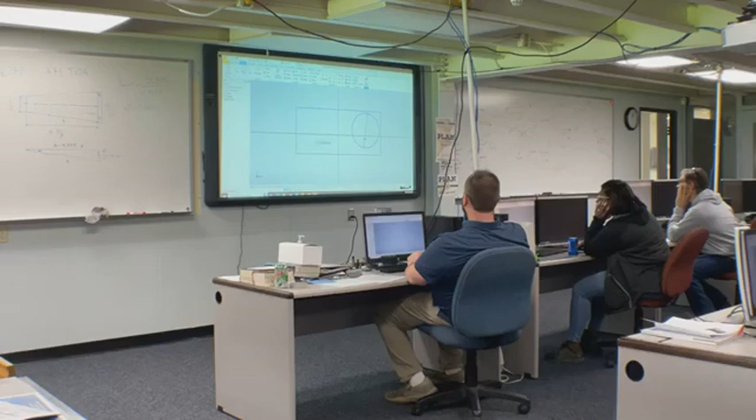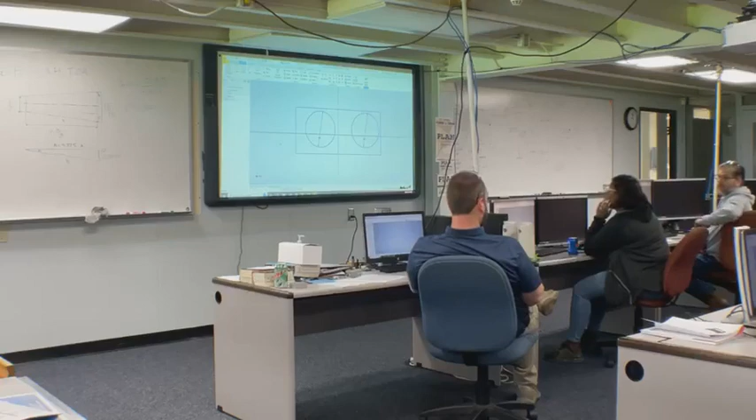As long as it stays within the confines of that rectangle, you can just drag it out, or you could actually enter a dimension, however you want to do it. Then come over to the opposite side and do the same thing again, just draw you a circle of some size. Does everybody have something that looks remotely close to that? Yeah, that's all we're asking for.

You want a hand? No, you're fine, here, we'll make it quick. We're going to use a rectangle command, just drag and drop a rectangle. I see, somehow your line type has been changed. Yeah, that's what was confusing me. Your line type, that's going to make all the difference for you.

All right, let's finish sketch. Now let's create a new sketch, just to let you start from scratch. All right, start a sketch.

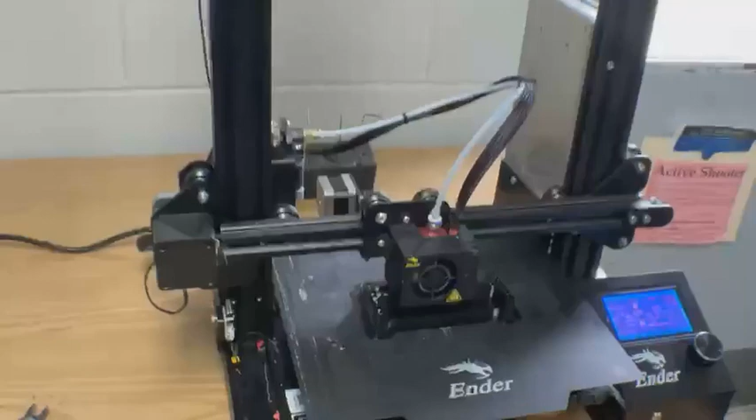Now things should start to look different for you. Okay, all right, yeah, that's what was missing. Sorry about that, I'm not sure how that happened. Center point circle, I'm just going to drop a circle in there, then I'll come over here and do the same thing again. I wanted to see what it looks like.

So you can call it whatever you want. I mean, kind of looks like a stovetop or an old stereo or something, whatever you want to call it.

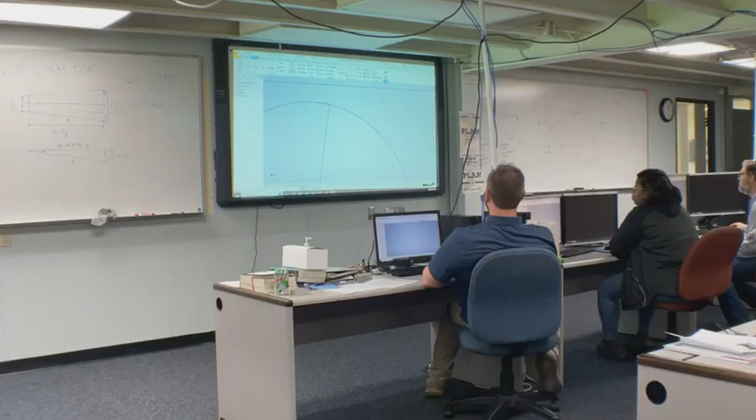All right, so I just want to show you a couple of features of this software real quick. Let's say we want to make a slot out of this, so let's connect these two circles. Let's take a line, take our line command, and draw a line tangent to the top of both circles. You're like, well, hold up, I only know what tangent means, how do I do that?

Well, if everybody will watch me, I'm going to show you one of the neat, powerful things about this software. Just draw something arbitrary, it doesn't matter what, you know that line's supposed to be tangent to the circle. Now come up here and select your tangent constraint, select the line, select that circle. Line, circle, it's going to make it tangent. Now it may shift the rest of your model to make it work, but the software is going to do whatever it has to do to make that constraint true that you just gave it.

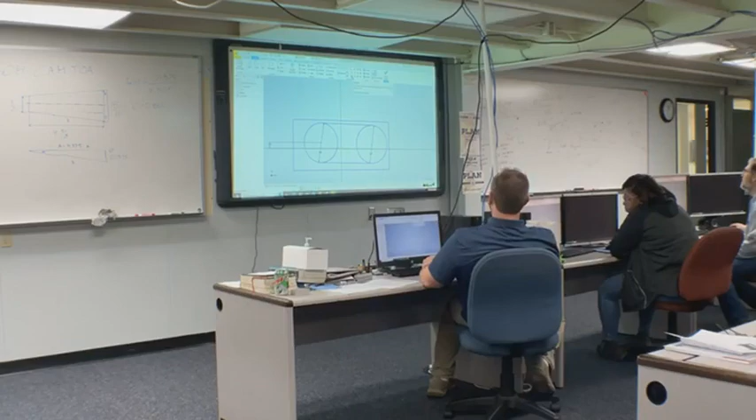All right, and now, right here, we have geometric constraints and we have dimensions. That's two things we're working with. I'm just assuming this back row is good, I'm not even walking back. Oh, that looks amazing, I don't know what you call it.

Yeah, one side did. Do you mind if I drive just a second.

So we want this line to be tangent to this circle. There we go, now you see that icon pop up. And you can tell that's not tangent because you've got that little giblet there. So, there, you see how it actually moved? And now, even though you're touching the bottom side here, you could do the same thing. There we go.

Now if you can just take a minute and just play around, do whatever, you can't mess up anything. You want to do what? It's not centered anymore once I do the bottom. Right, it's going to move whatever's not constrained to make the constraint you give it true. Okay, so it doesn't look true anymore. It looked more true before.

Where those lines are tangent now, that constraint you gave it is true. These two circles are two different diameters. That's right, is the issue. So what we could do...

Well, there's a couple different ways we could do this, but let's say that this vertical distance between those two center points should be 0. There we go. And now if you want to, you can come up here to your nice little trim command, clean this up. And now I'm going to go ahead and do the next step for you as well. Now we've got a slot. From 2 lines and 2 circles, we have made a slot.

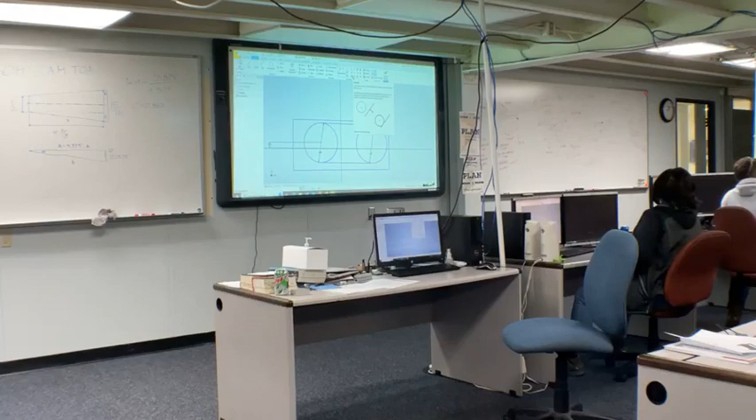So we can, all right, well, let's start over. No, absolutely not. We can do basically anything we want here. Let's say we want to move this by its center point. All right, yes, and now let's just simply move it. Now we're done with that.

Now, I'll tell you what, we'll do this to keep it simple. We'll do the same thing again. We're going to move that circle by the center point, that's what it means by base point. Okay, and now just move it down here somewhere. Okay, and now, to really...

All right, so we want this line to be tangent to this circle, and we want it to also be tangent to this circle. To make that true, it had to do that. So what we could do, move the circle, or we could move the line. Right now, I'm just going to delete the line. I'm going to delete this line and that little line.

I'm going to add a vertical dimension between these two center points, a vertical dimension. I'm going to change that dimension to 0. Now they're going to line up. That's just one way to go about it, you don't have to do it that way. Now I'm going to come back...

And I'm going to go ahead and draw my lines tangent now, or really close to tangent. And now, make that line tangent to that circle, line tangent to this circle. All right, easy enough, right? And now we're going to do the same thing on this bottom side. Line...

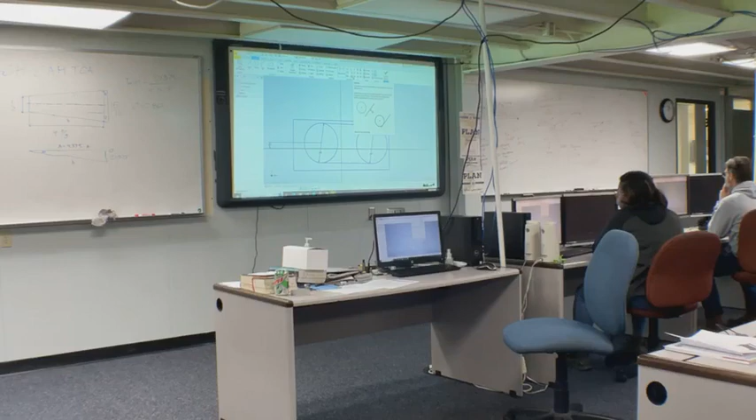Escape is your best friend with this software. All right, so the reason it's not trimmed out is one of these lines, we don't have what's called a closed region. Somewhere it's not actually touching.

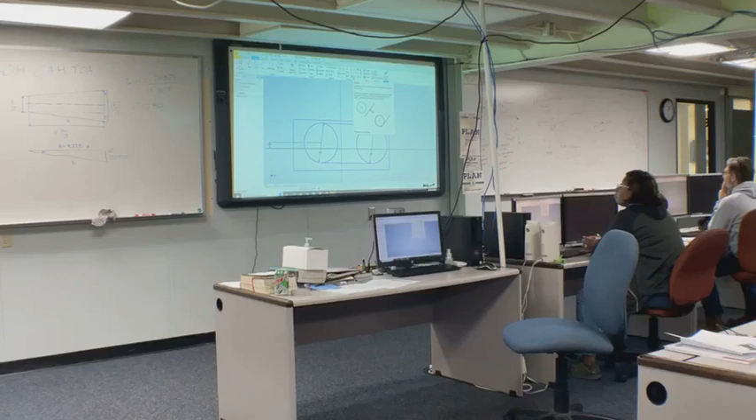I think it was at the top. So, all right, I just extended that out and extended that out. Now I'm going to come back and trim this side. And let's see if that took care of it. Trim. There we go. Okay. Beautiful.

All right, so everybody should be... there's really no right or wrong answer. This is just your time to play with the software.

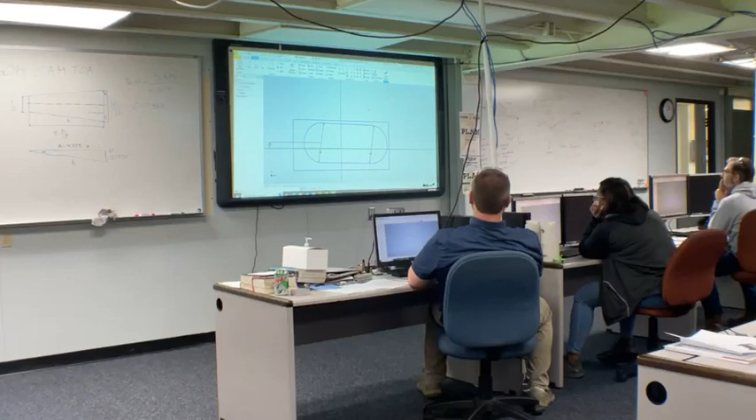Now I'm going to come back and I'm going to trim out the inside half of my two circles. And I'm left with that. All right, but so far, all we have done is put lines on paper. All we're doing is working in drafting space. This is 2D virtual paper space is what we're working in right now. I mean, this is the virtual or the computer-based equivalent of drawing on paper.

All right, let's finish the sketch. And now let's take it to the real world. Let's make this a 3D dimensional object. I'm going to come up here to extrude. I'm going to select this region here. How thick do... I'm going to slow down. I'm going to come back. There.

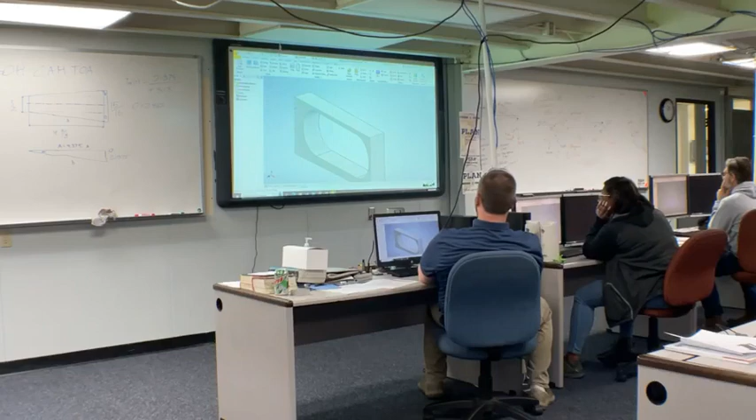Okay. So now, back in the sketch. I'm going to go back in my sketch, so I'll be the same place y'all are. Once you've got something similar, come up here and click on Finish Sketch.

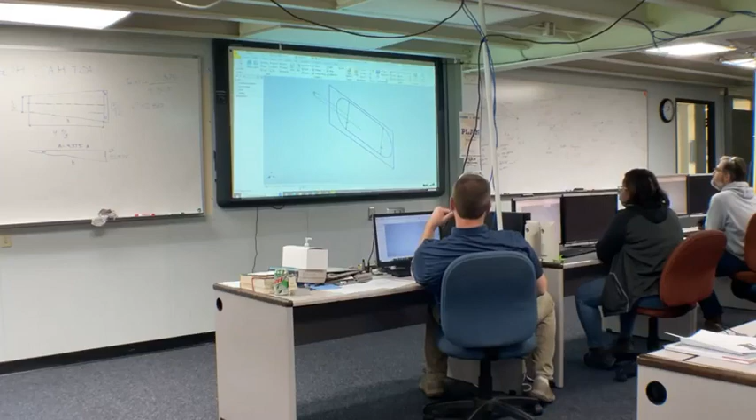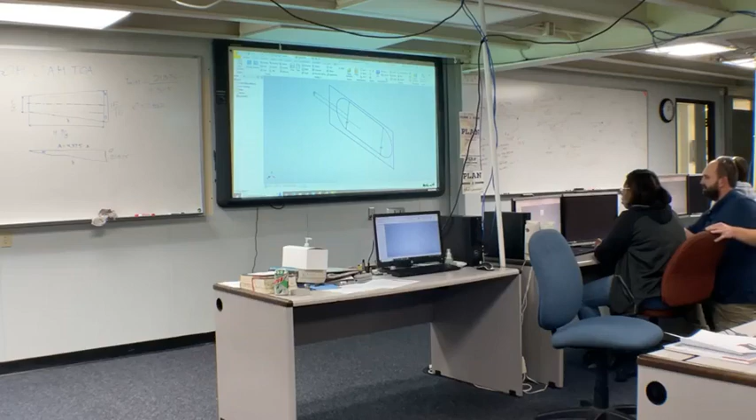Let's see what you got. When you trimmed it, it trimmed the whole circle because that line's not touching. So let's come do our tangent constraint. Boom. It was missed somehow. It happens all the time. Boom. There we go. Now finish sketch. Right there.

All right, so does everybody have something they can work with at this point? Yeah, everybody's got... that's all right. All right, you're good. Yeah, you don't have anything to ask about. You're in good shape there.

Let's see what you got here. There you go. You would just turn your view so you were looking at it from the very end. Look at that. All right.

So this is called parametric modeling. We can go back and change it. At any time, we could go back and make edits. That's why it's called parametric.

Take your job. Say that again. You don't have to worry about us coming to take your job. See what?

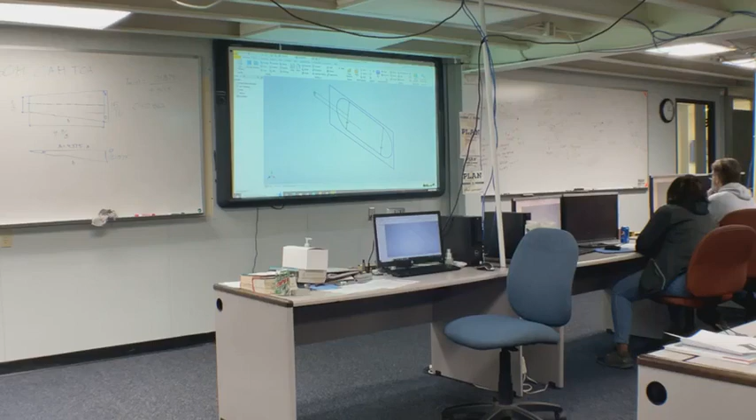Okay. All right. So now I'm gonna come back and I'm gonna trim the inside half of both of those circles. And now 2 circles and 2 lines made a slot, made a radial slot, an end mill slot.

All right. So now, once you've got something, I think most of you've got to this point now, but once you've got something, now we're going to finish our sketch. And now we're in 3D model mode.

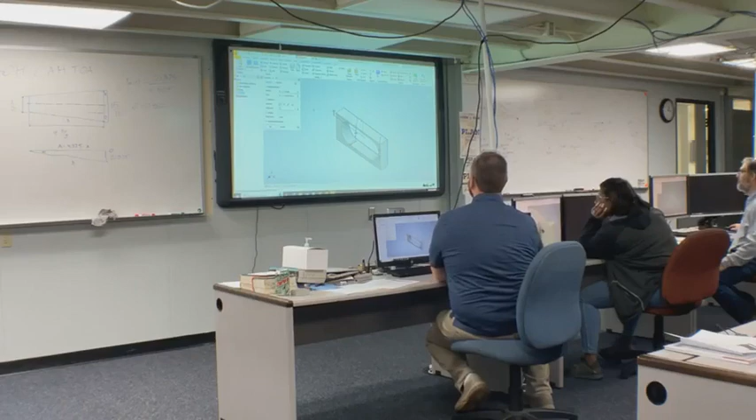Come up here, left hand end of your ribbon bar, and select extrude. And select the rectangular region of your part. Decide how thick you want it to be. I'm going to make mine a 1/2 inch right now. Click OK. And we have just gone from 2D paper space to 3D real physical object, just like that.

Did I do it right? Yeah. So I can just pick it up and move it. No, you can't do anything now. You can rotate your view. Select that, or you could use that, but select this little, there you go, select that, and now hold your left mouse, there you go. Okay. That's called free orbit.

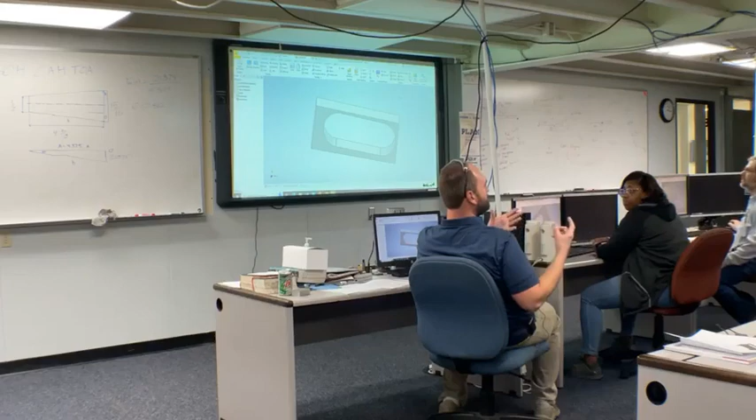So she asked an excellent question. Let's say we've got this part, we've made this part. This is feature-based modeling, meaning we're going to build up our part based on basic shapes. And that's what we just did. We used a rectangle, two circles, and two lines, and we made a part. That's all we did. So now let's say this part needs some other feature added to it.

So what I'm going to do is start another sketch, and I'm going to select the top face of this part. You can select any face you want, but I grabbed the top face of that model.

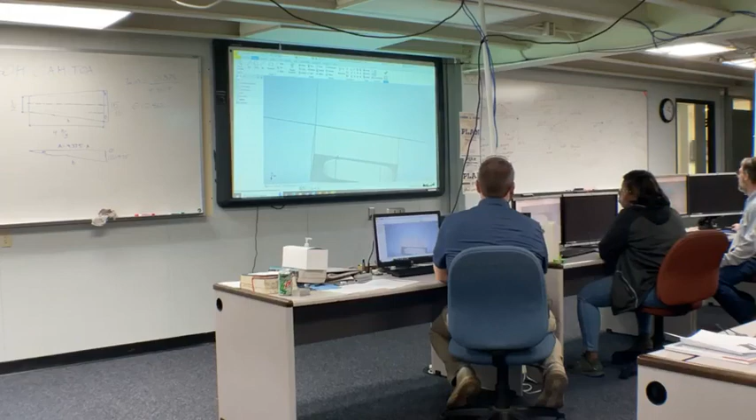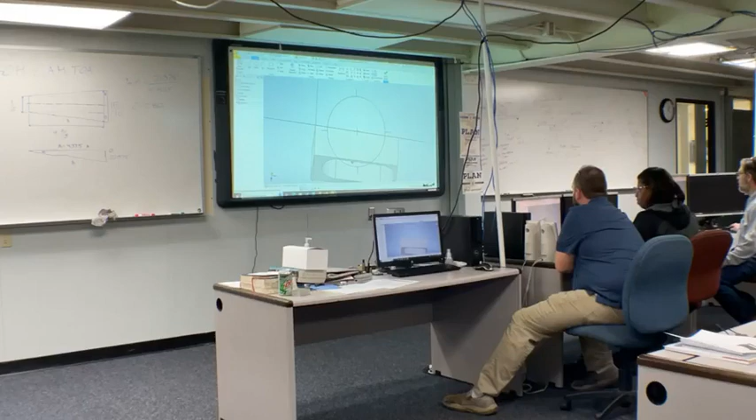Did you start a sketch? Okay, what face are you on? The front, I think. Okay, hurry up, let's see what you do. No, I like to just rotate to get my bearings. Yes, you are working. You see your grid, your coordinate system? So you're on the very front of that part. That's fine, draw something on it. Draw it, let's draw a circle. Whatever, now finish sketch. I'm going to pick that out. Look what you just did. Okay, all right.

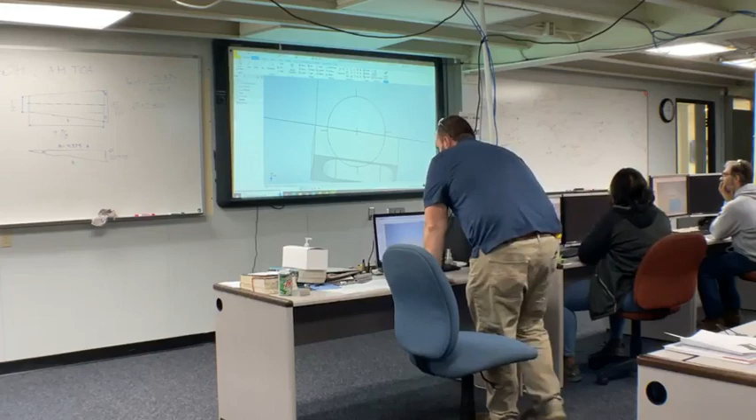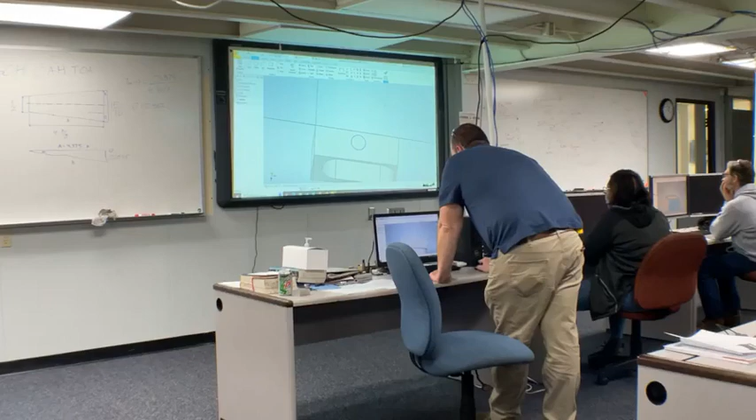All right, now I'm sketching on the top of my part. I created another sketch plane on the top of this model, so again you can do whatever you want. You guys are pretty experienced with sketching at this point, so come draw whatever you want. And when you're done, repeat the process: finish sketch, extrude. Here I can make a little stud coming out of my part, or let's say I want to go the other way and put a hole in my part. There you go, I just put a hole in my part. Did I need that hole?

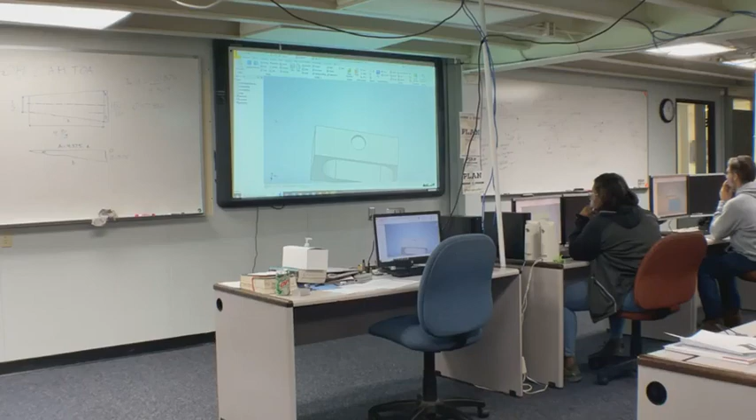Start 2D sketch, just select 2D sketch. Now select whatever face you want to sketch off of. Just click it, just click whatever side of the part you want.

All right, something's off, let's see. All right, you're already in a sketch, so what we're going to do is delete that, just to make sure we're on the same page. Start sketch, let's do this top face. Now to get your bearings, I just select my free orbit, left click drag. You can see where your grid is now, so that's the face you're going to be drawing on. Now you can just start doing whatever you want on that face.

Would you like some help with anything? Okay, all right. So we need to go ahead and speed up the process a little bit. I've got a lot I want to show you.

All right, let's think about the steps we've taken. I've tried to give you the basic premise of solid modeling, of parametric solid modeling. So if you combine those different tools, those different processes, you can do some really complex parts, some really complex shapes.

Here's one of my students' most recent designs. Ignore the file name if you can see it, but any guesses on what this part is? It does look like a bench. It's a park bench, a really small park bench. Do y'all have any need for a really small park bench? That's a great answer. So does anybody have business cards? Everybody here's got business cards, right? Everybody like a cool little bench to sit your business card in? Guess what, you came to the right place.

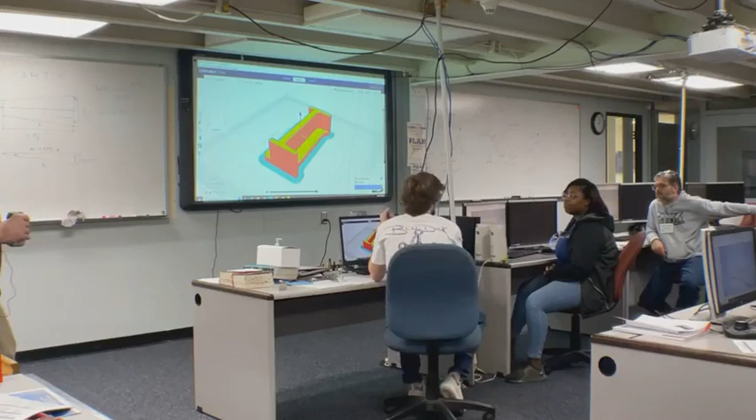As you can see, it's going to take about 5 hours and 32 minutes a piece. We were moving pretty fast along with those. We were printing about 4 at a time, so about a day and 2 hours per print, depending on which printer.

So the slicer is where you choose all the things that you want to do with this print. The print is going to remain the same, but you can choose how many walls you want around the outside, so how strong you want it. You can choose if you want like 25% infill. When I say infill, it's not a completely solid part. So I'll scroll down just a little bit.

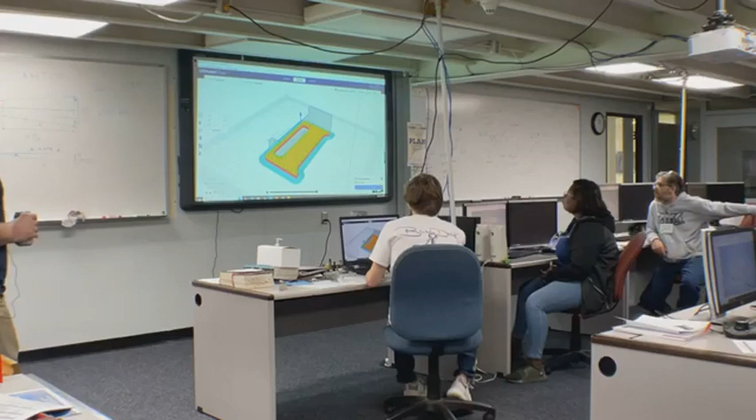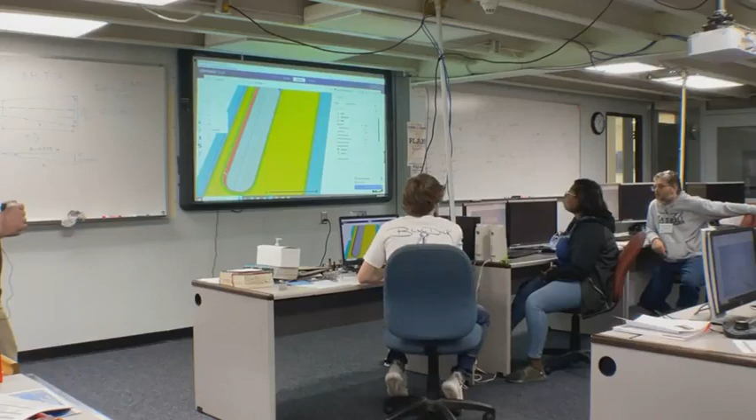This triangle pattern right here, it's not a completely solid part. That's just there to take up space and keep it pretty strong without wasting so much filament and keeping the time down. But with a couple clicks, I can go to infill... and make it a completely solid piece of plastic that the printer is going to print in.

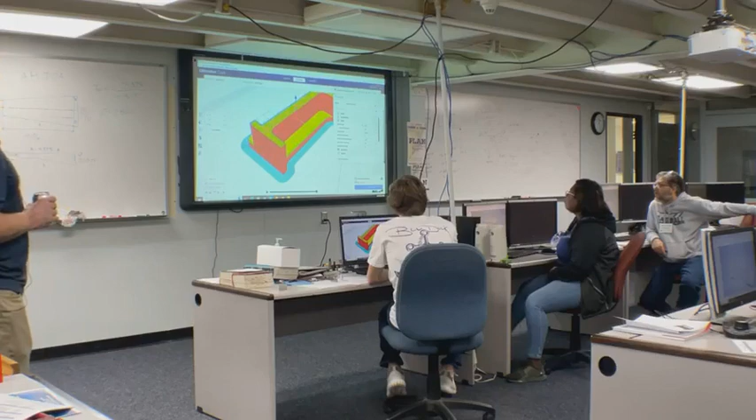It's double the time, but it's going to be much stronger. But for what it's doing, holding business cards, it doesn't need to be that strong. But you can see it goes layer by layer, so you can see exactly what it's doing on what layer. Here's all the different settings you can do.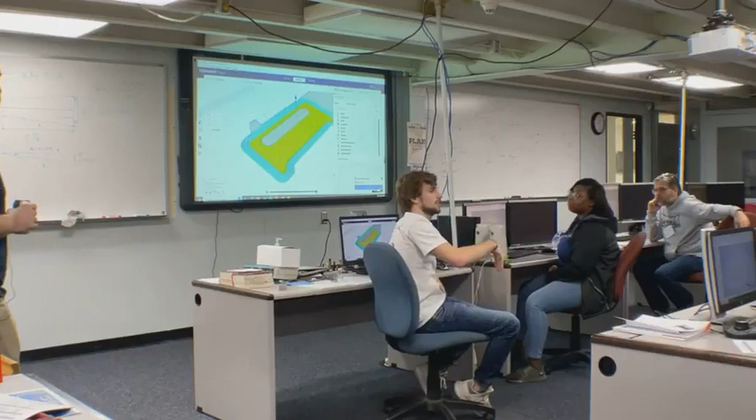There is supports, so what Matt was saying earlier, you can't print from nothing. Well, you're printing from nothing, and then you're going to have something. But the printer can't do overhangs. So if it starts to print on like a cliff, the filament's just going to fall down. It's got to have something to build upon. It just can't print into thin air.

So we wanted this model basically so it doesn't have to use supports throughout the printing this way. But if I was going to print it the other way, it can't print any of this. It would just fall. It would probably get about right here and then just literally fall on itself.

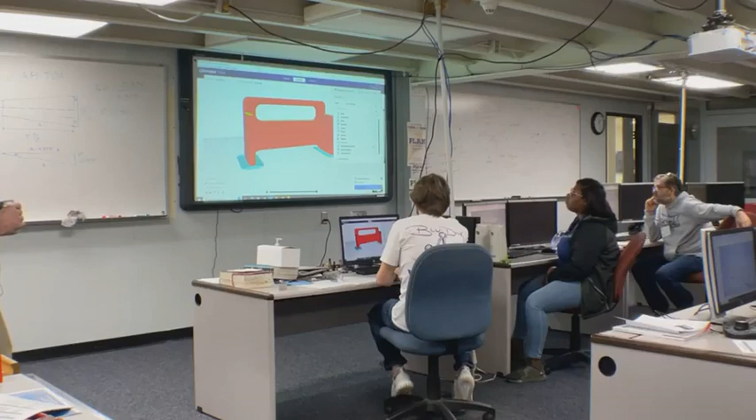So we can come over to supports, slice, and supports is going to take up more time anyway too because it's got to print more. And all that blue that you see, that's the support material. So now it can print any overhang you want. And then after the end of the print, you can pull it off the bed and then safely remove all the supports, and it's going to be your exact part that you want.

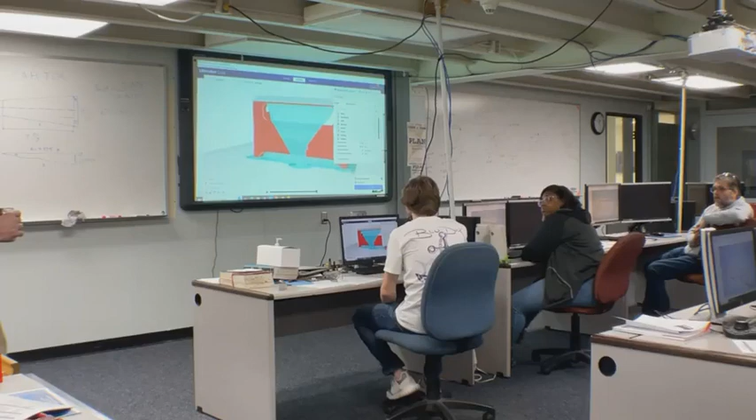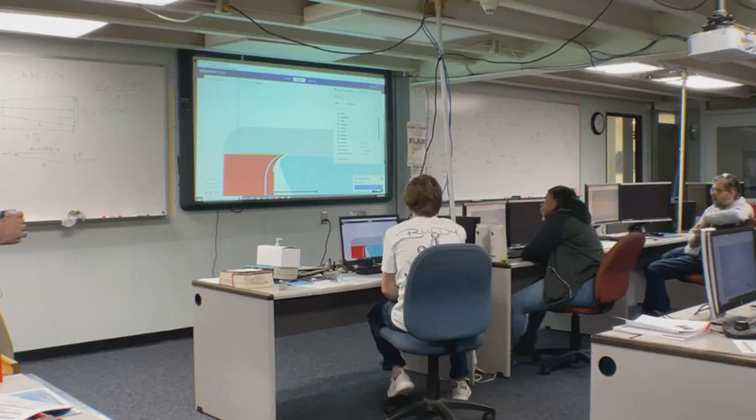Any necessary support material is not bonded like the actual part material is, so it'll just snap right off. It actually has a buffer layer or a couple layers, and it's not really holding on by much, so you can literally just pop it off with your fingers and it's going to be perfectly fine. Those X's, the darker blue, that's actually what is adhering to the actual part. So you can just break that off, take a small razor blade, or you can just peel it off with your fingernails, and it's going to come off perfectly.

Gabe, do you want to add anything? Well said, Dawson. All right, you guys have any questions for him?

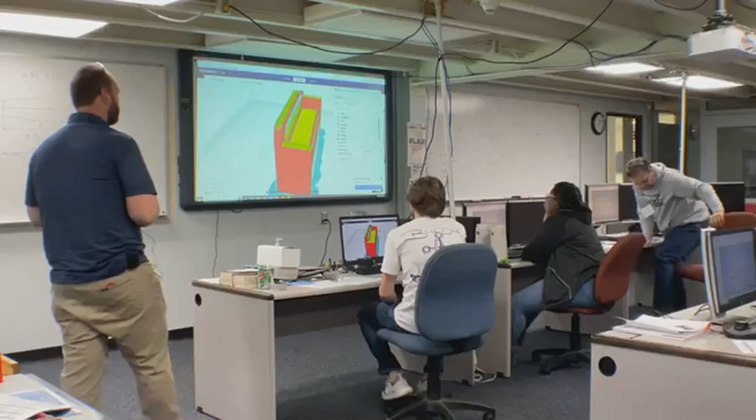All right, so that is a pretty thorough explanation of how we could create this particular part in an additive environment, in an additive manufacturing process. Well, let's say that we wanted to use a subtractive process. Let's say that we wanted to actually make this business card holder out of aluminum.

I mean, you're getting serious. You want to make sure your business cards don't go anywhere. All right, so you want an aluminum business card holder or whatever the part may be.

So now we've got to shift gears back to the subtractive side, okay? Now we actually have to start with material and start cutting it away. All right, so if you will pull up Fusion.

This is not the business card holder, but as you can see, I do have this particular part or product in this software as well. If you will simulate it. So bear with me, guys. This is just a part made out of aluminum, and it's got a lot of actions. He's going to show you a virtual simulation of actually machining this part.

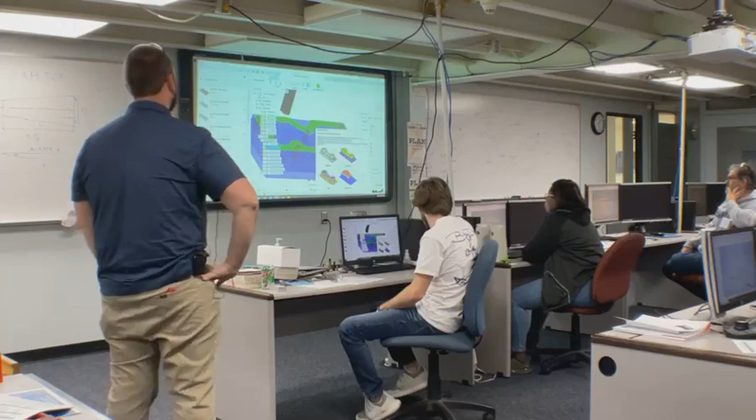It's hard to say, you can speed it up a little bit. We're getting there. This is a step towards the CNC machine. Yes.

So this is just walking us through the machining processes to create this particular part out of a piece of stock, and it just happens to be aluminum. As you can tell, there's pockets, there's shoulders, there's radiuses, and there's drilled holes, and then those holes are tapped with a 10-32 thread.

The green regions are the finished part. That's a chamfer tool, cutting a slight chamfer on the edges of the part. Now it's spot drilling for your holes. Then we're doing a peck drilling cycle to actually drill the holes out in the material, and then finally it's actually tapping, cutting the threads in the hole.

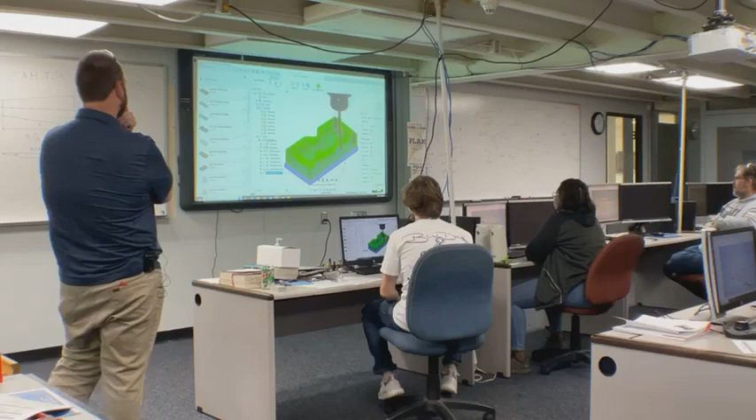It would have made a lot of sense for me to bring one of these parts in here, but I didn't. We do have them in the shop though. All right, so now if you will post-process that, but let me pause for dramatic effect. So everybody, you've got a general idea of the modeling process, and you've got a general idea of how we set up the production process or machining process in our CAM environment to create this part.

But going back to her question, what good is it doing us? We still haven't physically produced this part. On the additive side, we're physically producing parts, but on the subtractive side, we're still not physically producing parts. So what do we need to do? We need to go to the CNC machine.

CNC machines, computer numerically controlled machines, run off of code. They run off of CNC code, G&M code. So post-process this, please. Yes, post valid, or I should have said post all, but it's fine. Here is the code generated by that software to physically produce that part on a CNC machine.

Does anybody have any vague idea of what this code is saying right now? No, and you would be very odd if you did. All right, yeah, you've got some idea of it. Once you start to work with this code, you're going to start to pick up on it. There's G codes, there's M codes, but any time you see an X, a Z, or a Y, it's Cartesian coordinates. That's all it is. It's telling the machine where to go and what to do.

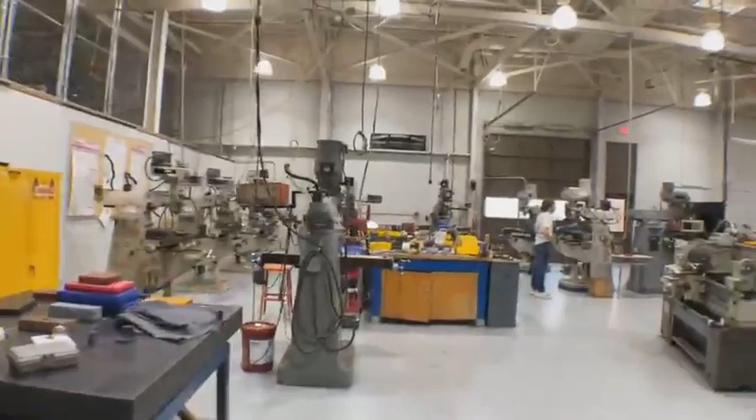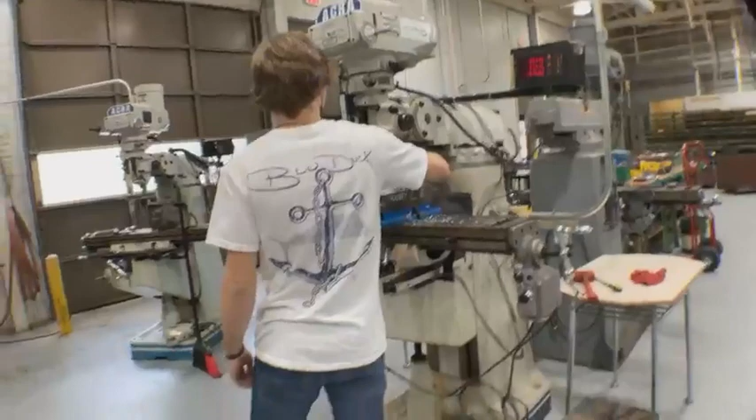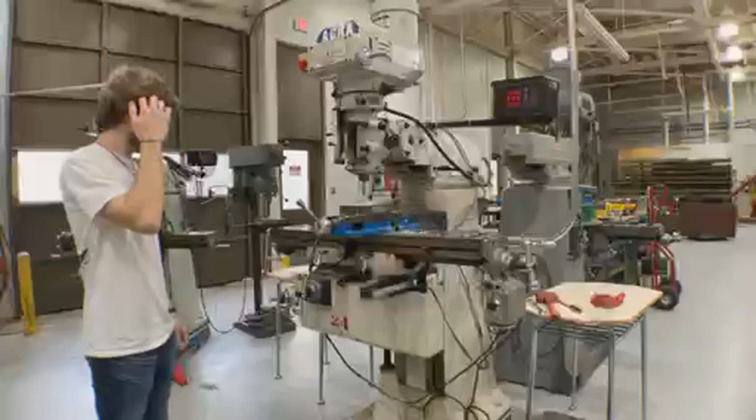Congratulations on this, I know you got some big day coming up. Monday morning, yes sir. Appreciate you being here, man. Well, it's all happening at one time. Oh, it's all good, it's all good. We're fortunate—well, I say fortunate, but it's a scheduled C-section, so we've got an idea, unless something changes. But it's pretty surreal. We have a 12-year-old and a 5-year-old, and it's pretty surreal to think we have another one on the way.

But it wasn't our plan. You'll get to relive some of the fun moments. Yep, we got a 28-month-old now, and just those stages where they really start to learn to talk and explore and all that. I've got two little girls, and this is our first boy, so it's really changing things.

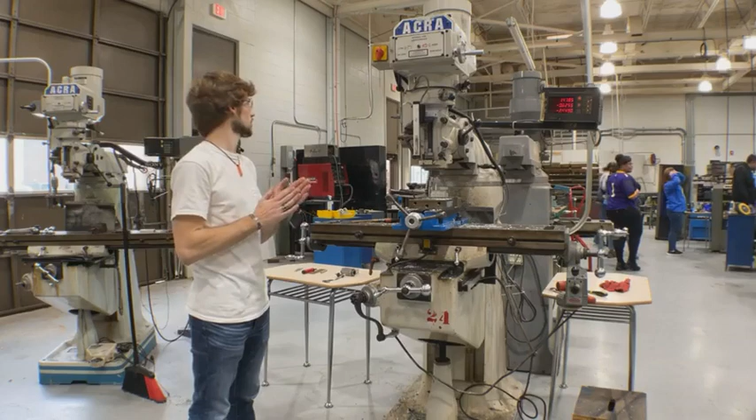We didn't have, with our second one, we didn't have baby showers or anything, we had everything. But now this go around, we've had 3 baby showers, so we've been really blessed. A lot of people just literally showered us with love, and we've got so much stuff, all little boy stuff now, so it's going to be interesting. But my wife's just ready to get it over with. She's feeling it. We're pushing past the years that we should be having children.

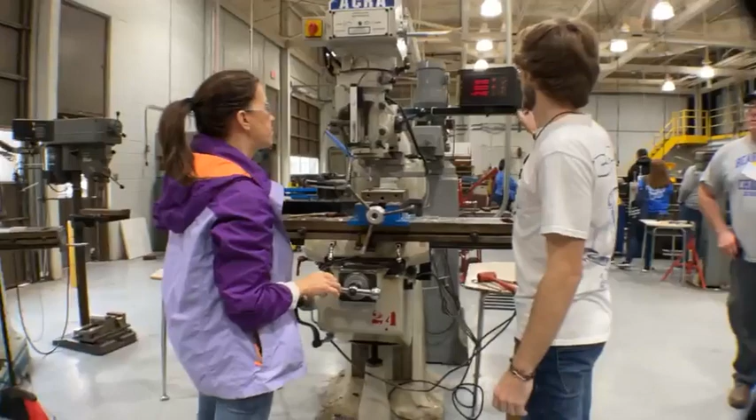Alright, so you can turn this, it's going to move it closer. Watch this readout, we want this to say 25. So you're going to turn it counterclockwise. Yeah, it'll be positive 25, so you turn it there. Okay, now it's right. I went that way first, and then it went okay. Keep going. Okay, 3. Oh okay, 25, like, right there. Oh okay, close enough, that's it.

Alright, so then you're going to turn this. You can turn that one over there if you want. You're going to turn that one counterclockwise, and it's going to feed into the part. So what you're doing now is conventional milling. The end mill is spinning this way and the part's moving this way, so it gives a worse finish, but it's easier on the machine. It's just cutting away as it's moving.

So when you go back across, if you want to take another 25, you can, so just go to 50. When you run it back across, pay attention to how much easier it'll feel now that it's actually pulling the material into it. So it's cutting like this, and then it'll start pulling into it. This is harder on the machine, but it leaves a much better finish. Notice how much easier it is to push. That's the way that it's spinning, and that's why it's trying to basically pull it across.

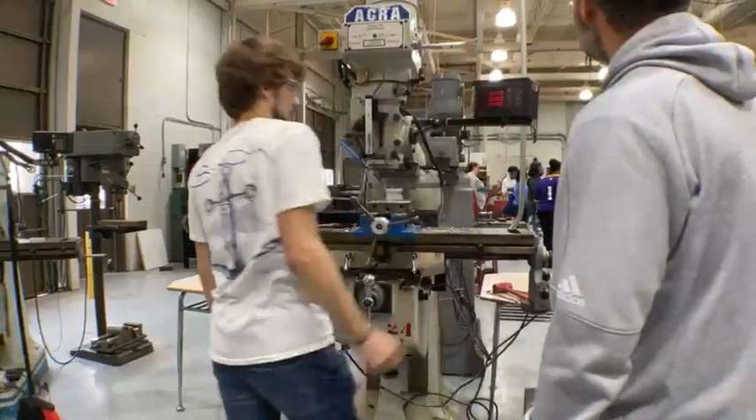Does anybody else want to try? Set on 0 so you can turn it on 25. You're going to turn it counterclockwise. So that's actually 3 thousandths. You're going to turn this till it goes to the base.

Notice, it's fine at 50. You're going to notice how much easier it is to turn it the other way.

What was the first name again? I forget. My name? Yeah.

Dawson. To put a step in that cut we're doing, do we use a different tool or the same one? You can use the same one. Did you want to put a step in it? Yeah, sure. Does anybody else want to do this beforehand? Alright.

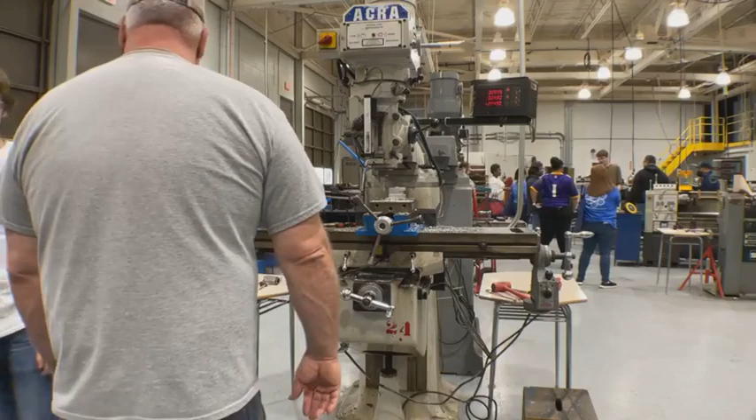Alright, so you're going to turn that counterclockwise, and you want this to say 2, 5. That's 25. So now you can feed it across.

Go to 50. Alright, now pay attention to how much easier it feeds across this time.

Is that angle as well? If you wanted to cut a 45 on there? You could. This machine, you can turn it - turn the head this way, that way. It'll swivel. Basically any way you want to put it, it'll do it. See how much easier it's feeding in?

Cool, thank you. Alright, does anybody else want to cut? You want to?

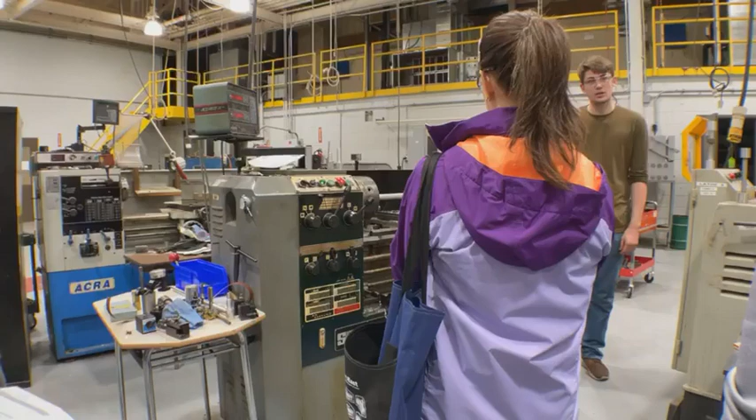This is your forward reverse. The forward is going to be your counterclockwise, reverse is going to be your clockwise. So when you come to this side, you want to go forward. The forward is going to be rotating this way, so the shear will be feeding into the actual cutting edge.

Let's break it down to this - you want something on top of it. This little grid you can see around, that's the chip right there. It breaks off the chip so that in case it builds up, you can see it going over here. A little bit longer, you're actually coming to that chip breaker. The chip breaker helps so it doesn't launch up, nest up, and start slinging all over the shop.